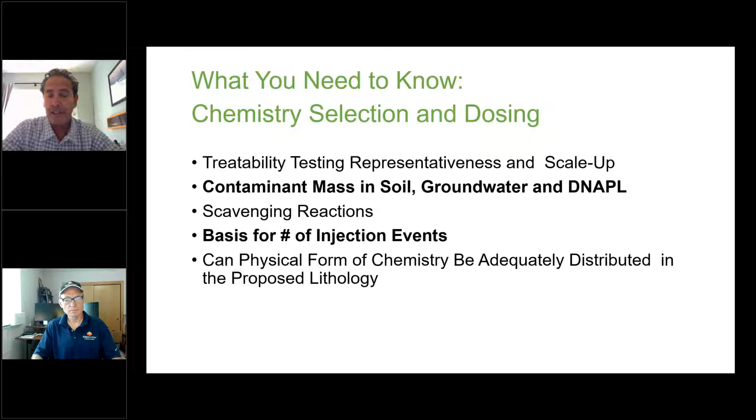Sorry about that. If treatability testing is done, is it representative and can it be scaled up? Do we understand contaminant mass in soil, groundwater, and DNAPL phases? Are there any scavenging reactions that we have to account for? What's a good basis for the number of injection events for a project? And then something close to my area of expertise, can the physical form of the chemistry be adequately distributed in the proposed lithology?

So in terms of contaminant mass, the point here is in terms of transparency, there's really two scenarios. You've got a turnkey project where you've asked the vendor to provide you with a design, the chemistry, and the delivery, or you've developed the design and selected the chemistry, and you've reached out to a vendor for delivery. And those are really the two scenarios.

And so in the case where you're getting the design and the dosing, it's really important for you to understand all the contaminant mass distribution in the various phases. And then also what kind of porosity is going to be used. Is it effective porosity? Is it mobile porosity? It's really important to understand that as part of the design that you would receive.

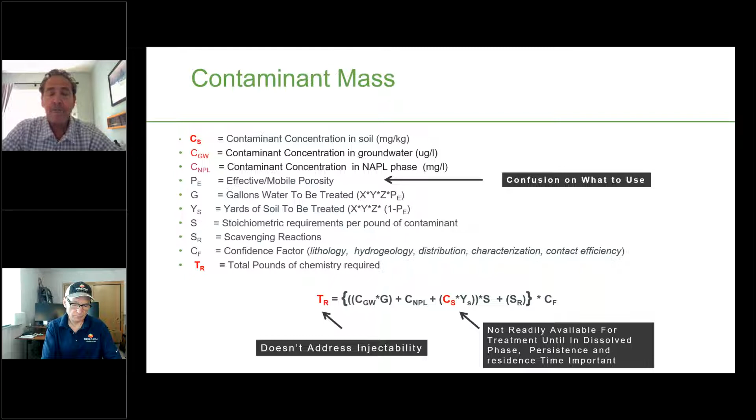We need to also understand how the sorbed phase is going to be treated and managed over the life of the project. So when you get a design, I think it's critical to get that information.

The other thing is, how do we develop the number of injection events? And so there's a lot of different approaches to that. I think it's very important to understand, is all the sorbed and dissolved phase being treated in one event, or is there some accounting for matrix back diffusion that will allow or provide you with the information to be able to come up with a rational basis for the number of events?

And in this slide, basically what we're doing here is coming up with a basis for the amount of oxidant we'll need based on the mass in groundwater and soil, but we're also taking a stab at what kind of back diffusion rates we're going to get and how much oxidant we can inject in each event without wasting any of the oxidant. So very important to understand how the number of events is developed, the basis, and not just rely on a rule of thumb.

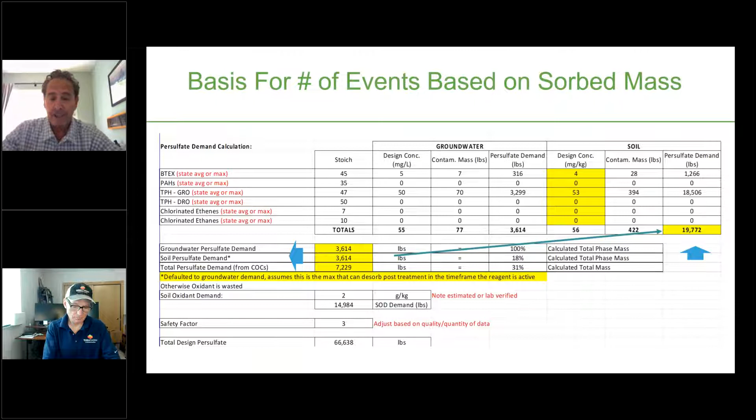And then here you can see what we've done here is we've taken the total amount of, in this case persulfate, that we're going to inject. We divide the total amount that we need stoichiometrically, and that tells us we're going to need 3 events.

So if you're getting a design from somebody, it's very important that you understand how they're reconciling what's sorbed in the soil mass, in the dissolved phase, and if there's DNAPL, that's even more important. So these are very items that require high transparency for you to assess the type of performance you're going to get on your project.

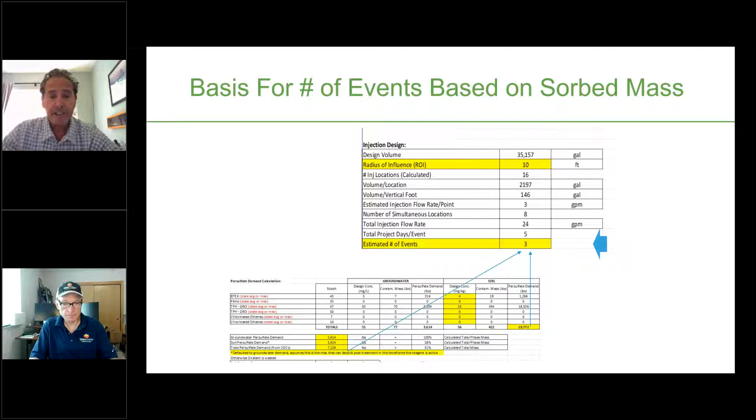So then we move over to the injection design, and there's key issues here that need to be understood. You need to know what's the design basis for the radius of influence, what's the design basis for the injection volumes to be injected, which relates directly to the radius of influence. What's the basis for the target interval you're going to inject into, and then your basis for the delivery approach. And then also, we'll talk about pressure and flow limitations that are very important when you're looking at making contact.

And then also a subtlety, but what's the basis for where these injection locations are placed versus where the monitoring wells are located.

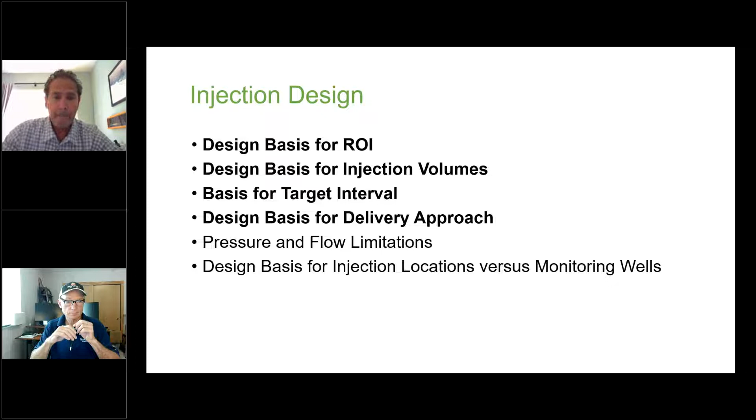So in terms of radius of influence, we've talked about this for 15 years in different webinars. And on the right, you can see that's probably your ideal case of a core 10 feet away from an injection zone with potassium permanganate. So you can see, that's the golden goose we're trying to achieve, and obviously that's more difficult as we get into heterogeneous sites.

But it really comes down to understanding the mobile or effective porosity, the volume you're going to inject, how much additional flow you're going to get by advection, and then that'll add up to your radius of influence. And so in this case, an 11.5 foot radius of influence is achieved by injecting 20% of the pore volume, effective or mobile, depending on how you look at it. Additional 8 feet of effective distribution, and that all occurs in 16 days.

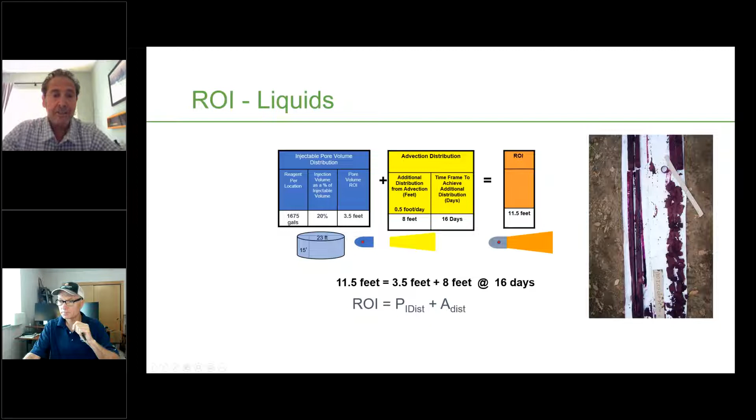So the other thing you have to take into account is the residence time and persistence of your chemistry. So that 16 days becomes important when, let's say, you've got very low seepage velocity or flat gradient, and it's going to take 180 days to reach 11.5 feet. So that's radius of influence, and that's key in terms of transparent information on a project.

The other question in a design is, what's going to be targeted? Is it the transmissive zones or the storage zones? We all know that in most sites, 90% of the groundwater flows through 30% of the cross-sectional area. Am I going to design based on injecting into that? Or is the design going to focus on the 10% of groundwater that flows through 70% of the cross-sectional area, which is typically fine-grained material?

Am I going to go after that by fracturing or enhancing permeability? You can see on the left, there's somebody struggling with that decision, and believe me, that's a critical decision in a design and approach that you've got to understand moving forward.

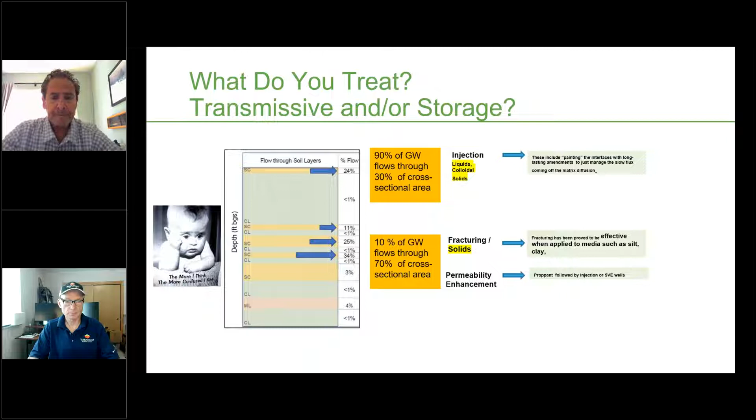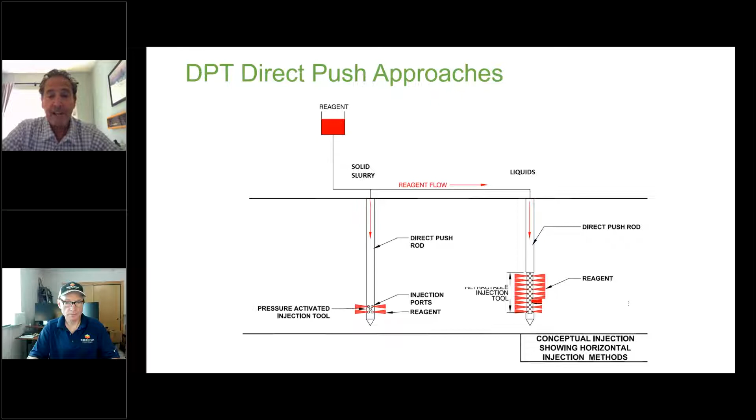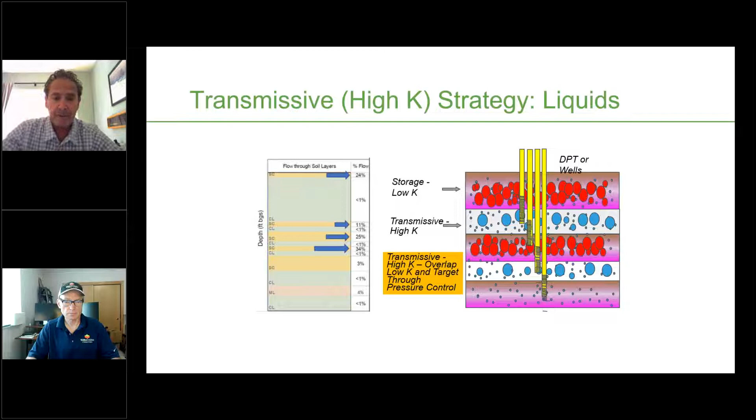So we get into this situation where maybe the design is going to just target transmissive zones with direct push wells. We can do that with injections, direct push screens or well screens, and we can intercept the high perm zones and get amendments into those transmissive zones. That's an example of an injection tool that can be used to accomplish that kind of distribution.

When we look at both low and high K zones, a lot of projects want to target everything. It's really important to understand that that's what you're getting. In that case, you're going to have to use a more aggressive targeting approach with a jetting type tool to really make sure you can get amendment in both the storage and transmissive zones.

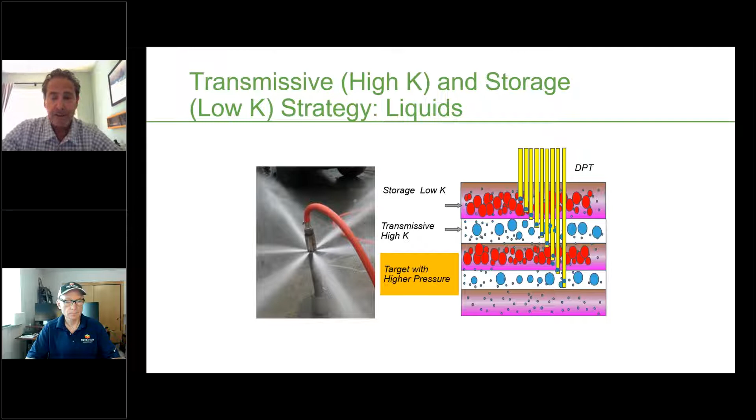The other thing we look at is the direct push rigs and tooling, the pump selection, the mixing equipment, and the flow and pressure measurement. At the end of the day, it's all about the pump and how we can control and manage it. So it's very critical to understand what pump you're getting on a project.

When we look at direct push drilling, for example, these are key items. I won't go through all of them, but this is the type of information you need to obtain as you move forward on a project, selecting an approach and a contractor, or deciding how you're going to do it yourself. With direct push drilling, there's the drill rigs, the type of tooling, whether or not you use inner hose, how you overcome refusal, and how utilities are marked and hand cleared. All of these have direct and indirect impacts on performance optimization.

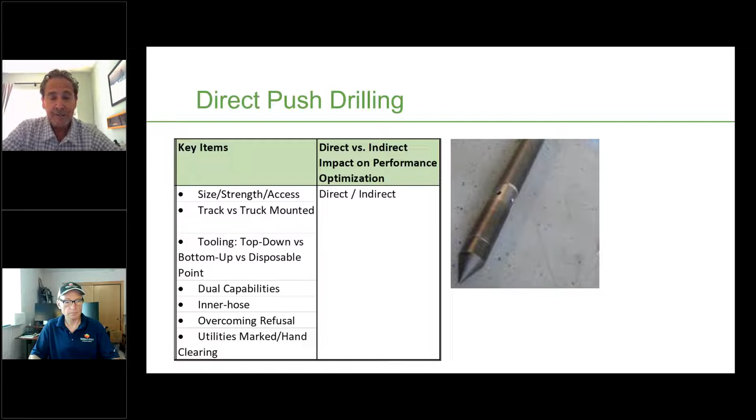In this case, they can have a direct impact in that the type of tool can definitely affect the type of distribution you'd achieve. But they can also have an indirect impact in that, what I like to say, it takes your eyeball off the task at hand. There's a lot of things to focus on, and if you're focused on things that aren't going right, then you've got less time to focus on the things you've got to get right, which is the actual delivery and contact of the amendments.

And there's just another tool: the pumping systems. Obviously, as I said, that's critical, it has a direct impact on performance. You really need to know the pump type, its pressure and flow curves. Does it have to be calibrated? Can it handle liquids versus solids? Is it compatible with corrosives? How is it powered? Does it need pressure relief? Does it have a variable speed drive, or do you need to recirculate? And how is that pump going to be manifolded?

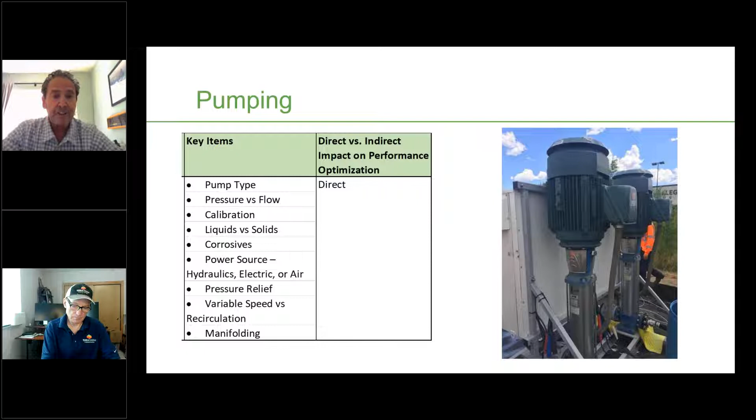You can see here, this has a direct impact on your results. The manifolding is also important because that's going to impact your cost. So the ability to optimize through manifolding is something you need to understand — how many points, how it's going to be done, how the points are going to be started up. All that type of information is going to be very critical for you to be able to understand the performance and measure that in the field.

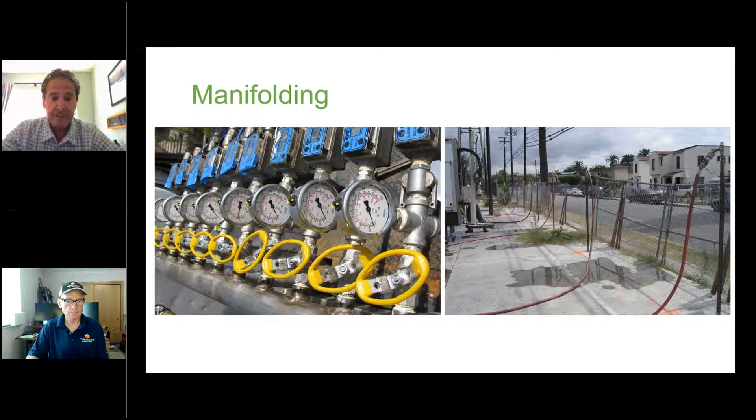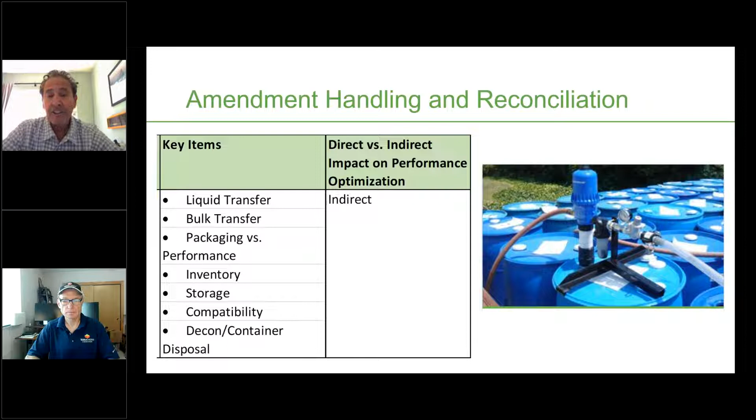Amendment handling and reconciliation is always important because you don't want to end up at the end of a project with too much or too little amendment. That has an indirect impact typically, unless you don't have enough left over, and then it can have a direct impact. You need to understand how liquids and bulk solids are going to be transferred, packaging versus performance in terms of mixing efficiency, what your inventory will look like, how you're going to store it, whether all the amendments are compatible with each other, and how you're going to decon everything when done. These are all important factors you need to understand.

Mixing is critical because if you don't get a uniform mix, you're not going to get good distribution. There are issues like inline mixing, batch mixing, tank size, how you're going to mix liquid and solids. Are you going to inline inject something like Dehalococcoides? How do you handle overflow? Are you going to pulse mix, or do you need to filter? What kind of ventilation and air monitoring requirements will you have with bulk solids?

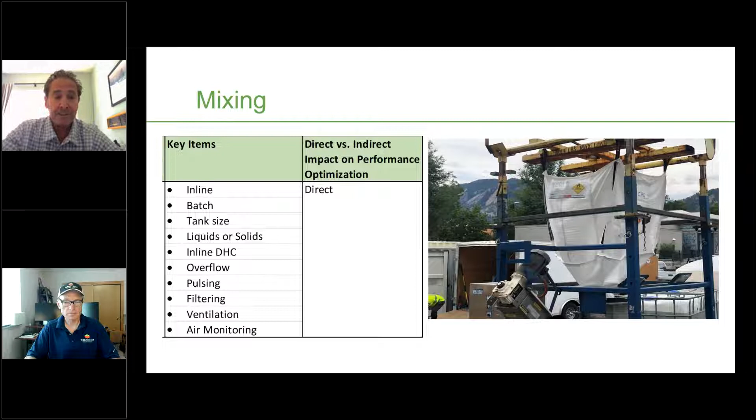Here are some shots of different liquid amendment mixing capabilities, but generally they're totes, small tanks, large tanks, and sometimes intermodal containers. You really have to have a very good understanding of how mixing is going to occur on your project.

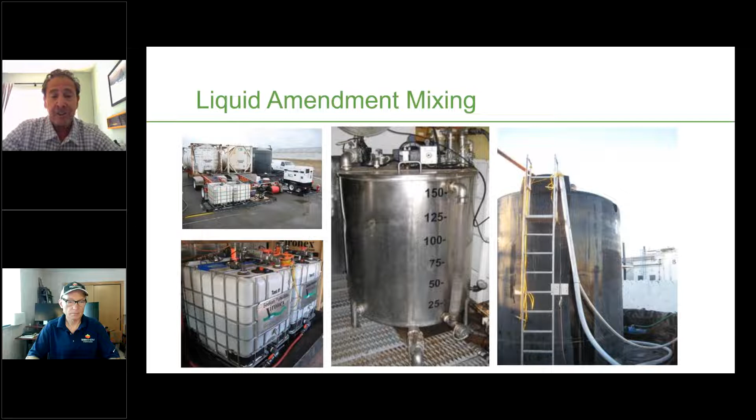When we look at pre-mob, really the key issues are the footprint of the site, the equipment, how everything is going to be delivered, secondary containment, exclusion zones and decon, water and leak tests, rental equipment being delivered, scheduling, night or day work, work hours, and DOT restrictions. All important things that need high transparency.

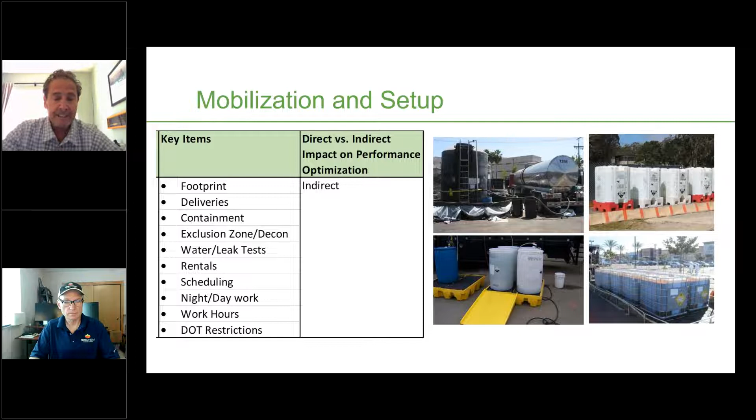Safety. I don't mean for this to be last because it's first, but it's often overlooked. There are key items for safety: the health and safety plan, the safety data sheets, the JHA, JSAs, standard operating procedures, and what PPE is going to be used. Our experience is it's all over the map, and you want to make sure you or your contractors are protecting themselves. A spill control plan, PFDs of the operation or equipment to understand how it works and what safety issues could arise. Tailgate meetings and near miss reporting, training of the folks, and how you manage short service employees.

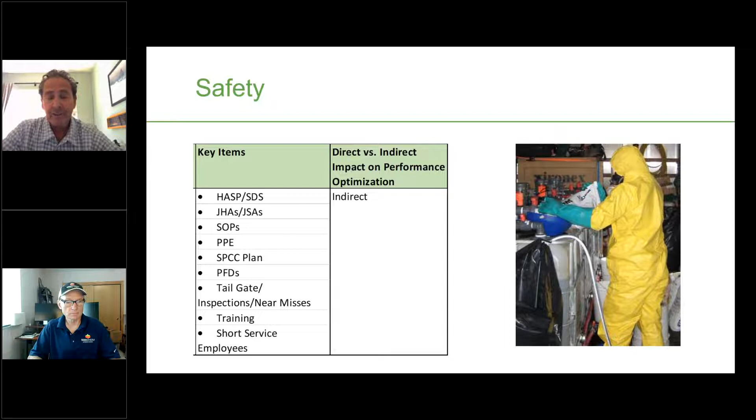Safety is another indirect issue, but if any of these things rear their ugly head, they can have a direct impact because, like I said, they take your eyeball off the project.

What else do you need to know on injection? Really, you need to understand if shakedown and distribution testing is going to be performed, how everything is going to be monitored, and what the approaches are for troubleshooting.

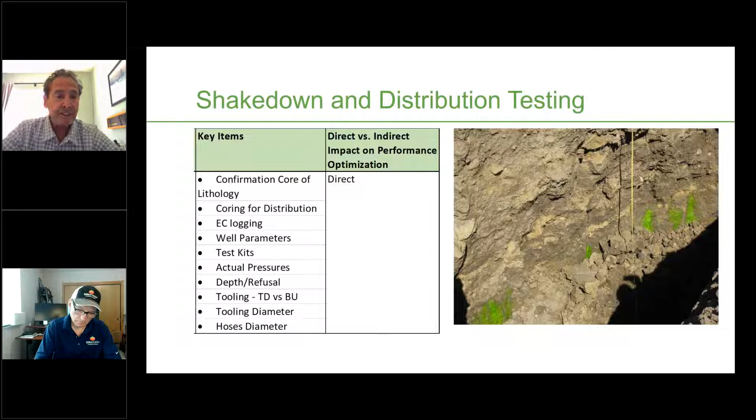But we really need to understand: are you going to take cores? Are you going to do electrical conductivity logging? Are you going to monitor the wells for parameters? Are you going to use test kits? What actual pressures are you going to see during the test? Is depth and refusal a problem, which it can be? What tooling works best, top down or bottom up, and in terms of tool diameter and hose diameter? This is critical information that directly impacts the success of your project.

On the injection logs, what you've really got to understand, critical especially when going back to understand post-injection monitoring results: how is pressure flow going to be measured? How are you going to measure the time amendments are injected? How do you reconcile inventory to make sure you're on track? Whether you need to measure air quality for certain projects. Are you going to use digital or manual recording devices? Do you truly understand the depth, intervals, and boring locations you're at? These all have direct impacts on project success.

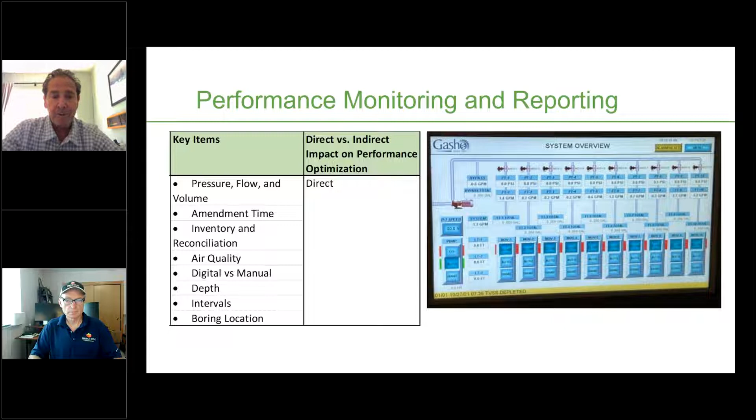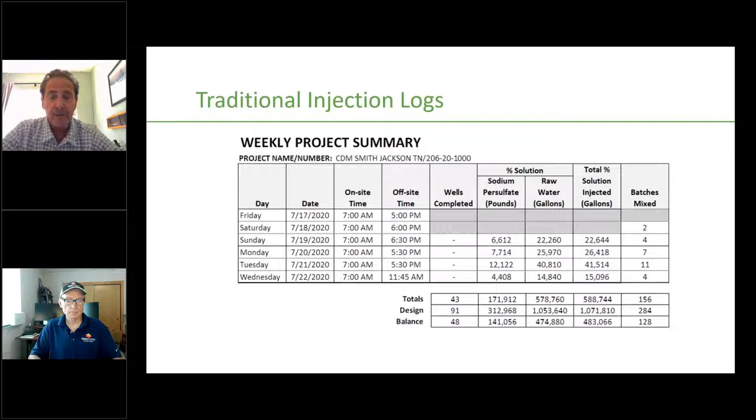But typically, this is what you're going to at least want on a traditional injection system: a weekly summary, the amount of amendments injected, total solution, batches mixed, and then you want to accumulate that data over time so you have a running total. This is the minimum information you want on a project at the high level.

You then want to get into the actual injection locations, where you want to understand each individual well or direct push location.

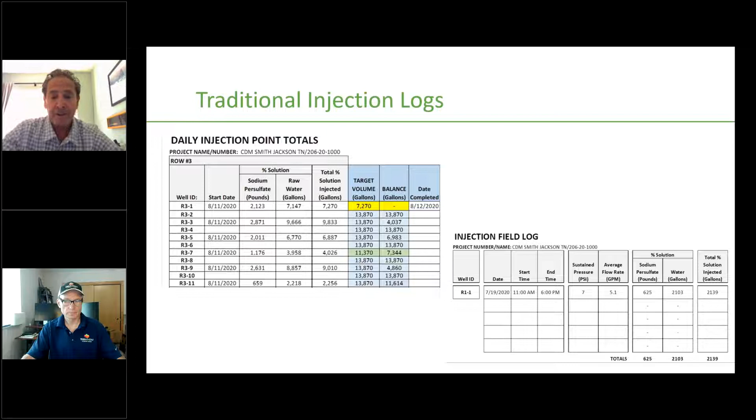And then you want to be able to go in and measure pressures and flows, and the amount of amendments and total solutions at each individual point and at each individual interval. So this is what I would consider the bare minimum to have, to be able to understand what happened during your injection event. It should be totally transparent.

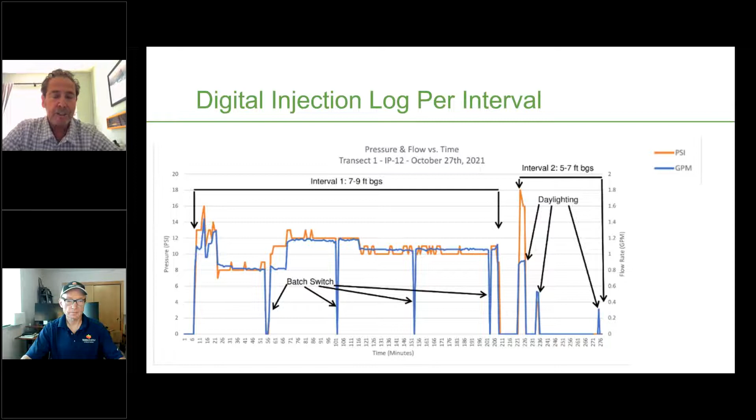If we go with a digital approach, you're going to eliminate all this uncertainty. In this case, we're able to track pressure and flow continuously, and you can have no uncertainty as to the averaging time, or was it recorded effectively manually, and things like that. So while it's not a requirement in terms of transparency, we believe it's the next step in terms of transparency related to how the injection event went.

And then troubleshooting - I'll finish this real quick. Not everything goes right on an injection project. Hopefully it's man versus geology and not man versus equipment, but you need to understand how troubleshooting can occur. Things like pressures and flows not being what was expected. You've got refusal, you're getting daylighting, you have to skip intervals, you've got adverse weather conditions, equipment breaking down, which hopefully is kept to a minimum.

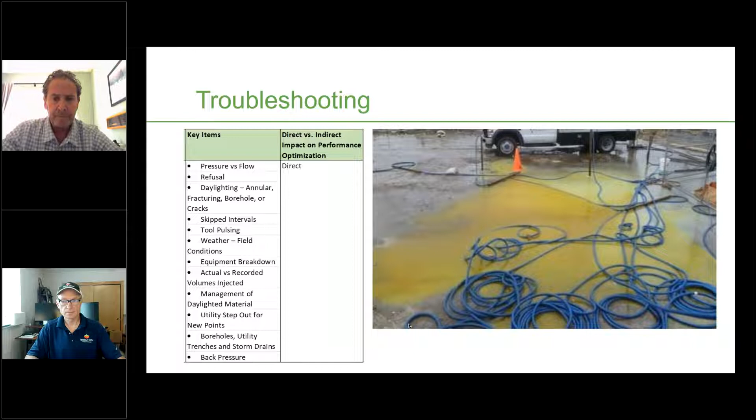So at that point, I think I gave you a lot of information on what you need to know, whether you're designing a project yourself and subcontracting out the injection, or whether you're getting the whole enchilada from a vendor. Those are the key things we believe need to be 100% transparent, and will just help ensure that you get what you wanted or expected.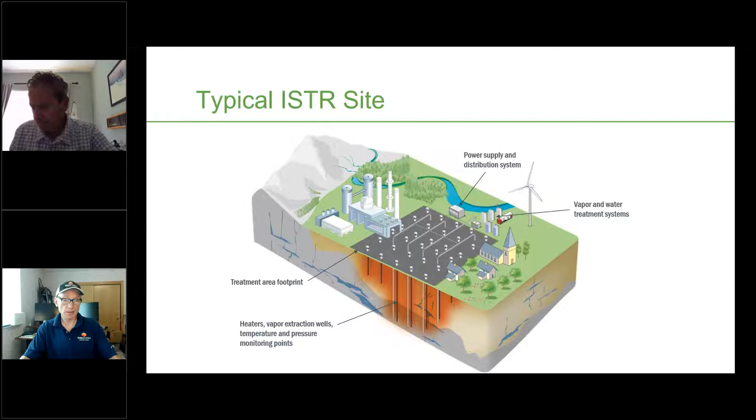That generates COC vapors, but it also generates steam vapors, and the COCs partition into the steam. Then we have an extraction system that pulls all of that out of the subsurface and sends it to a treatment system. So big picture, that's basically what in situ thermal remediation is.

The technologies that we have in our capability to implement or use at these sites to heat up the subsurface: thermal conduction heating, where we drill holes, put pipe in, put a heating element in, and heat the subsurface via thermal conduction. We also have electric resistance heating, where we put electrodes in the subsurface and apply a voltage potential to those electrodes, encouraging current flow between the electrodes - it's the resistivity of the soil to that current flow that generates heat or heats up the subsurface.

We also use steam injection, where we basically have a small injection screen, typically 1 to 2 feet long, and we target specific intervals to inject steam, developing steam zones within the subsurface that surround and envelop the target treatment zone. And in some cases, depending on the geology, we use both - a combination of TCH and steam, or ERH and steam, to heat up the subsurface.

All of these technologies apply at least vapor extraction to remove steam and COC vapors. In some applications, like when we're using steam, we'll also extract groundwater to provide not only pneumatic control, but also hydraulic control, so we don't spread contaminants and remove everything in the subsurface.

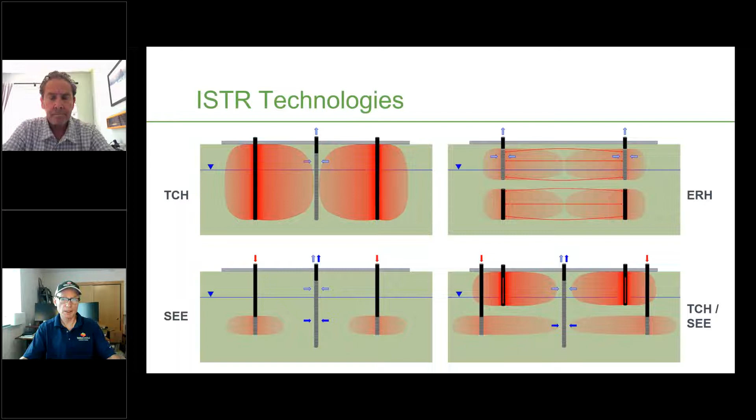In situ thermal remediation is really primarily a mobilization technology. What we want to do is mobilize the contaminants out of the hard to reach or hard to access zones, the DNAPL, the low permeability zones, get that into the vadose zone where we can extract it and send it to the treatment system.

So how do we choose? First off, we start with COCs. We look at what contaminants we're targeting, and primarily we're looking at volatilization and steam stripping to get those out of the subsurface. But if we look at the low temperature approach, in this green section of the figure, this is actually not targeting volatilization as much as it's targeting degradation.

So either bio or abiotic degradation mechanisms. When we heat up to 35 C or so, we can promote biological degradation. And if we take temperatures up to 70, 80 degrees C, we can actually promote abiotic degradation mechanisms such as hydrolysis. For certain COCs, we can do a very good job with that.

The nice thing about that is we don't need vapor extraction and treatment systems, so it can be very cost effective. But for the bulk of our sites, we're looking at heating the subsurface to 100 C, targeting VOCs, BTEX, CVOCs, as well as some of the lighter end semi-volatile compounds like naphthalenes and chlorobenzenes.

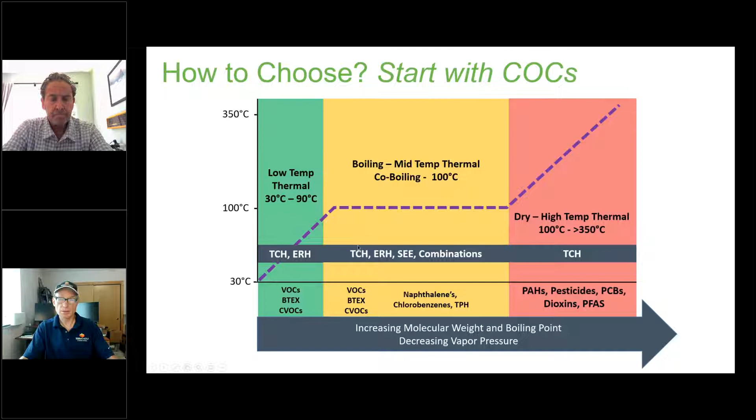And then we always have the ability to go to higher temperatures depending on if we're targeting PAHs, PCBs, even PFAS. But primarily, most of what we see from site remediation for in situ thermal is targeting 100 degrees C, and for that range we have a bunch of options: TCH, ERH, steam, and different combinations.

So how do we choose? Once we know what our COCs are and we're looking at the 100 degrees C treatment approach, then we start to look at what geology we're targeting - what are the specifics of the site.

A lot of our sites have a mix of geology. So we might have sand and gravel units, we might have silt and clays, we might get into saprolite or fractured rock. We need to look at all of these and evaluate how these technologies or combinations would do. The key parameters based on these technologies are the thermal conductivity of the soil or rock.

The electrical resistance - again, this is when we're looking at using ERH - and the permeability. Permeability comes into play not just in terms of being able to inject steam in the subsurface for effective heating, but also in terms of assessing how much groundwater flux below the water table we might have in a zone. So we have to evaluate all of these.

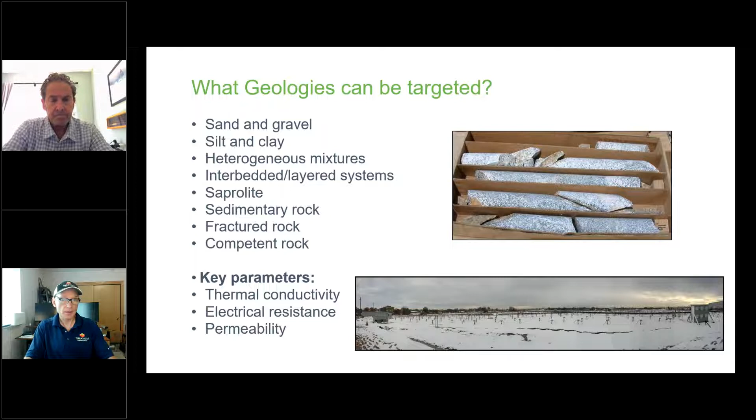What we find though is that thermal conduction heating is a great fit for a lot of sites, and that's because of the uniformity of thermal conductivity. When we look at thermal conductivity for all the different materials in the subsurface - minerals, sedimentary rocks, volcanic rocks, et cetera - we have a total possible range between 1.5 to 7 watts per meter Kelvin. That's a pretty tight range compared to permeability or resistivity. So what we see is the site variation is generally within a factor of 2 to 3, which is pretty narrow.

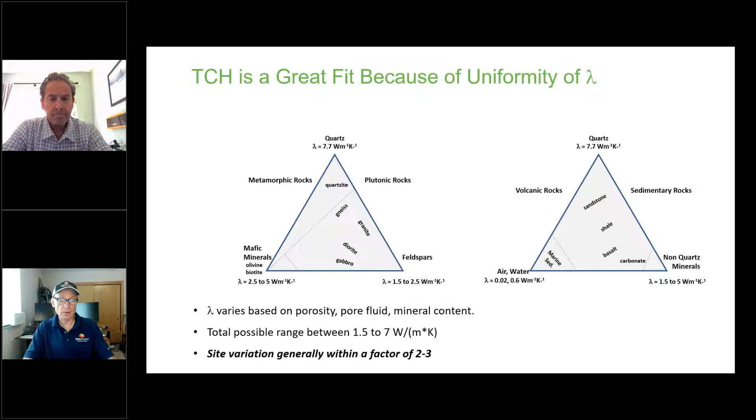Electrical resistance heating, when we look at that, is based on the electrical properties - the conductivities or the electrical resistance of the soil. What we find is that the optimal range is 10 to 500 ohm meters, which is a measurement of the resistivity of the soil.

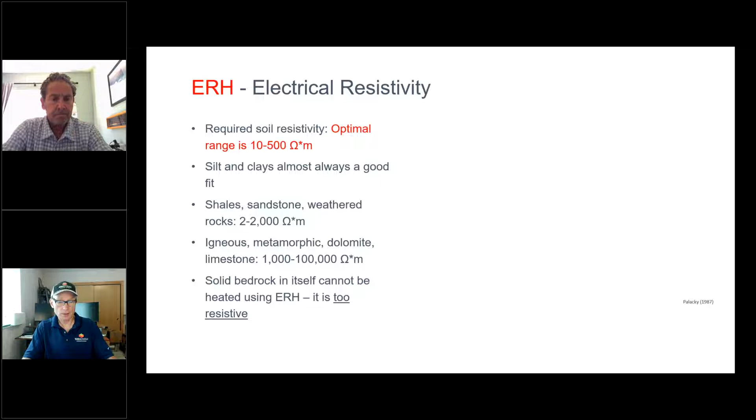Why is that? Well, we can do sites that have lower resistivity, meaning they're more conductive, or sites with higher resistivity, but that requires special equipment, higher voltages, a lot more current, and it makes it more complicated and in some cases riskier. If we have to use high voltages at those electrodes, we can run into stray currents and voltages that might be an issue for workers or building infrastructure. So we tend to see this range of 10 to 500 ohm meters as being pretty ideal.

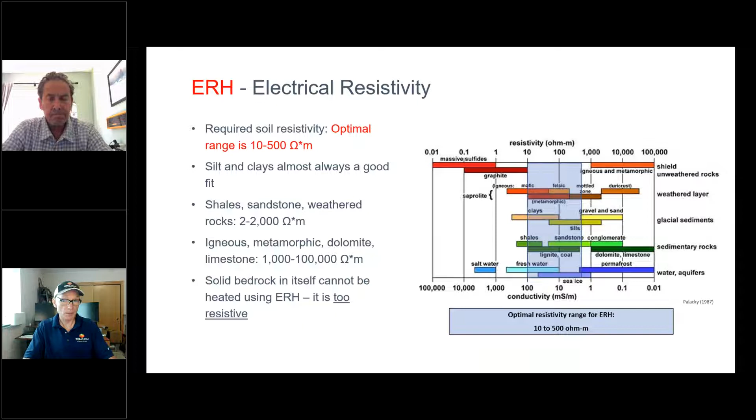Solid bedrock itself is not conductive to sufficient levels for ERH heating, so it's just too resistive. We don't use it. So for sites where we have optimal resistivity, we can use ERH. Where we have sites with much higher or much lower resistivity, we can then use thermal conduction heating. We look at choosing the right technology for the site, not trying to use one technology for all sites.

Where we have high permeability and potentially high groundwater flux, we can use steam alone if that's the entire treatment interval, or we can combine steam with other technologies to address the groundwater flux and do a good job of heating.

Generally what we find is that steam is a good fit if we have basically 1 Darcy or greater in terms of permeability, or in centimeters per second, that's about 10 to the minus 3 centimeters per second. If it's higher permeability than that, it's good for steam. If it's lower, it's not so great.

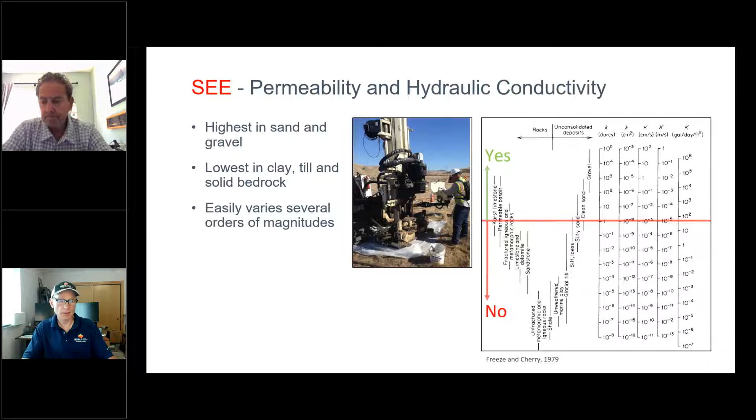What we find with steam is that it's very dependent on the permeability. Unlike thermal conduction, permeability ranges by many orders of magnitude at a site. So this is why thermal conduction heating, or TCH, combined with steam, or even ERH at the right resistivity ranges combined with steam, make good applications for a site.

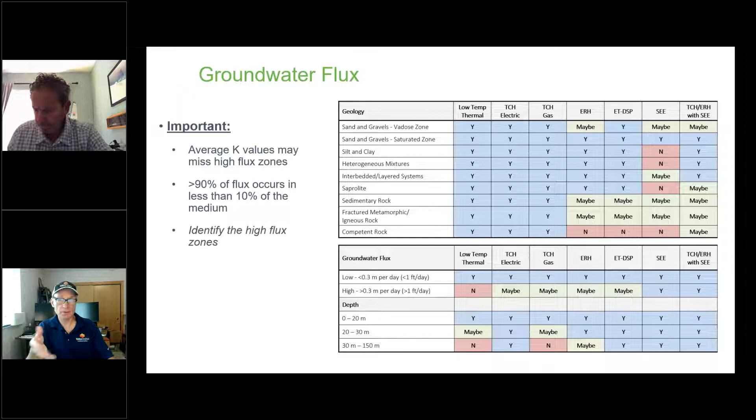This issue of groundwater flux is important, and I think Elliot touched on this before, but 90% of the flux occurs in less than 10% of the cross-sectional area, because of the effective porosity or permeability of these formations. So when we look at data from a site, it's important to have good hydraulic conductivity data and discrete data over particular units, so we can identify where we might have high flux zones, so we can design systems around that high flux zone to address it, and add steam if we need to do a good job there.

So let's talk a little bit more about design and lifting the veil on how we do the design. I kind of think of this as getting a quote to paint your house.

You may get 10 quotes or 5 quotes. They range in price, but until you dig into it and see what kind of paint are they using? Is it oil-based? Is it water-based? How many coats are they applying? Are they brushing your house or scraping it first? What are they doing for cleanup? How many people are going to be out there? You really can't compare those numbers, because you need to understand what goes into that design in terms of what you're actually getting for that price. What is the quality of your house paint going to be? How long is it going to last? How's it going to look? How much mess is going to be in your yard?

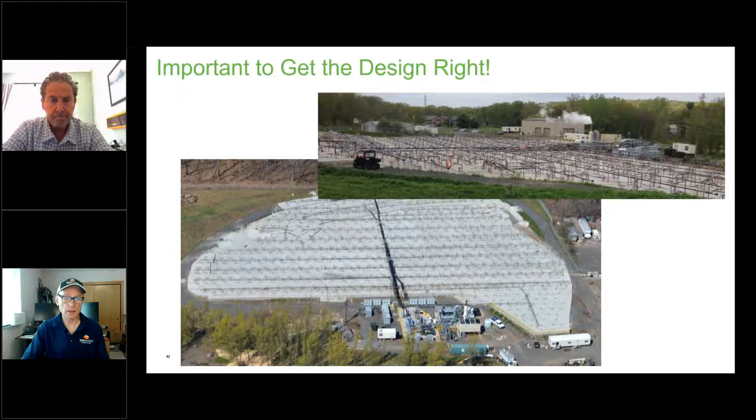You have to do that. You have to look at the details. So that's what we're going to look at here relative to thermal. The important thing with thermal is you got to get it right. These are not simple systems. They're complicated, can involve quite a bit of infrastructure and quite a bit of drilling. So you better do your homework up front and select your technologies, but also do a good job designing, because it's pretty hard to overcome mistakes you've made up front once you get into implementation.

Let's start with something very basic to thermal, which is we got to add energy to the subsurface. So what this graph shows you is an example site, 5,000 square meters, which is roughly 53,000 square feet, so a little more than an acre. We're using ERH here. We have 2,000 watts per meter input into the subsurface. What that means is for each meter length of electrode, we're putting 2,000 watts in. And that gives us a heat up here of...

This gives us energy density input, and then for different spacing, we get the number of electrodes, and we can actually look at - this could be heaters too, we'll talk about that in a second - but if we have, for example, 6 meter spacing between our electrodes, we'd have a little more than 250 electrodes over this area.

And we'd have ultimately roughly around 90, a little more than 90 watts per meter cubed going in.

So this is important. How many coats of paint, how much energy are you putting into the subsurface? What are your design assumptions? What is the unit length power input, whether it's ERH, TCH, or steam? How much steam are you injecting into the subsurface? And then looking at the spacing that you have for these things.

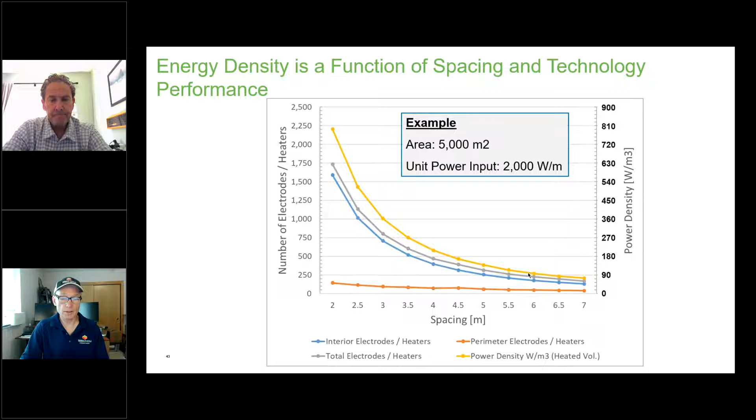Also, importantly, if you don't do this, then you have a situation where you're heating on the inside, creating steam, and it's pushing to the outside. An outside perimeter of heaters or electrodes pushes and provides that hydraulic and pneumatic control.

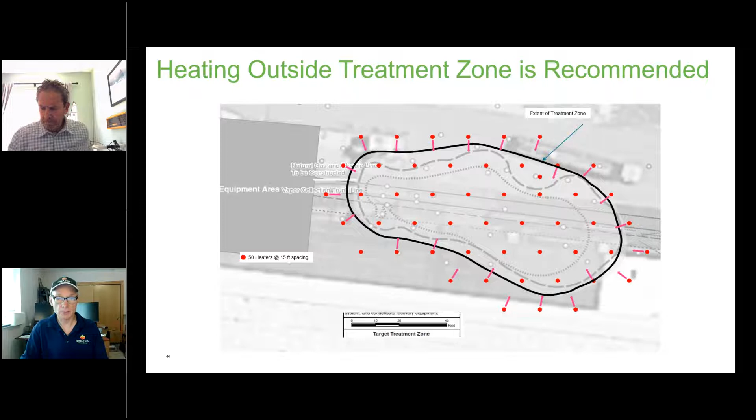So when we look at this for ERH, for example, pretty standard spacing is somewhere between, this is in meters, but it's roughly 18 to 21 feet. If we look at that kind of spacing, 2,000 watts per meter, that gives us 54 to 85 watts per cubic meter. So that's what you want to be looking for in terms of the proper energy density to achieve cleanup within 6 to 8 months.

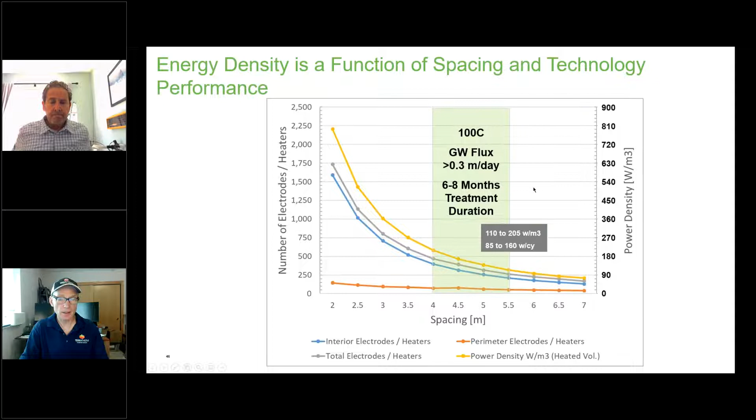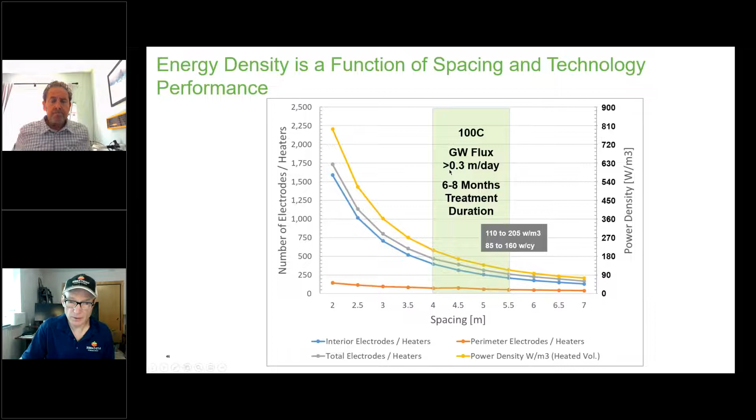If we decrease that spacing, we can get much more energy into the ground, and we can actually treat a little bit higher groundwater flux rates within that same time period.

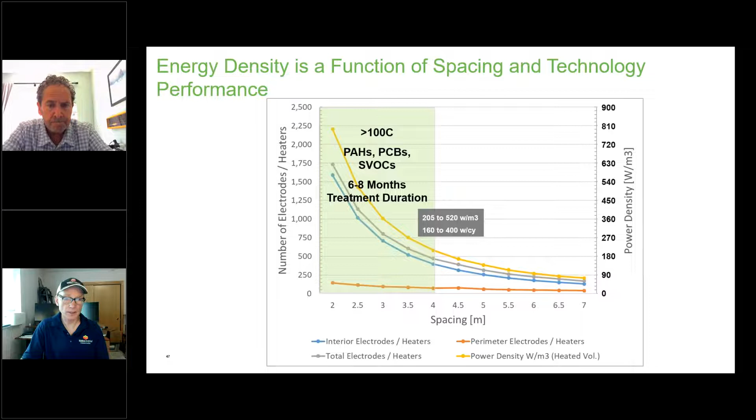And if we're using thermal conduction heating, we'll use much smaller spacing. It's obviously a lot more heaters, but this is where we can achieve temperatures of greater than 100 C, as much as 350 or 400 C if necessary to treat PAHs, PCBs, and such.

So let's take a look at how we use these numbers. Again, this is getting into the detail of the design. It's not enough just to say I'm giving you 100 heaters, 100 electrodes, and it's going to be done in 6 months. You want to ask some specific questions.

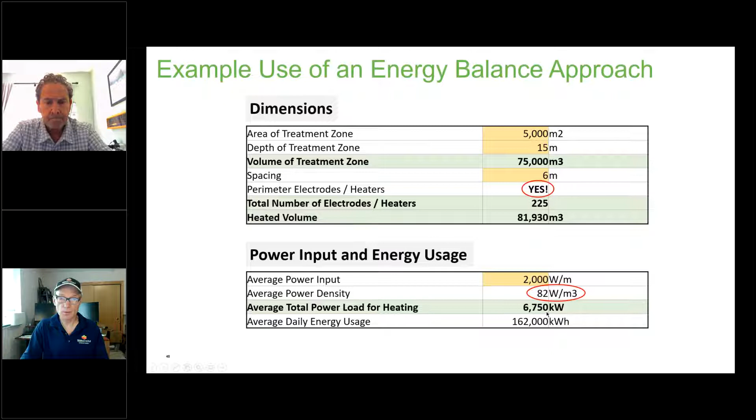One is, what is your spacing? Are you including perimeter heaters or electrodes? This is key, as we just saw. And what is your average power density going into the subsurface? We want to target somewhere in the range of 70 to 80 watts per meter cubed to get effective heating at these sites. Once we do this, this is where we get our total power load, or what we need from the utility to heat the site.

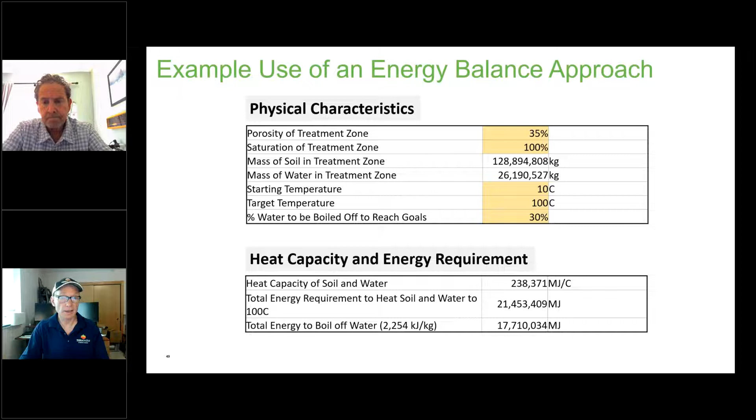You also want to know what's going into those calculations relative to assumptions about porosity and saturation. This is all going to factor into how much energy is needed. So we have so many heaters, electrodes, or steam injection wells, we can put so much energy in over a period of time. We have a certain heat capacity or energy requirement to meet those goals or to heat the site up. That gives you the duration. So all of these things are really important to take a close look at.

The other side of this, which is often overlooked, is the heat loss calculation. You're going to get heat losses to the top, to the bottom, the sides. What is your conductive and groundwater flux heat loss? What is that number, or what percentage is that of your total input?

The other thing is that all of the energy that we put in doesn't stay in. We have to extract the steam and water. So what is the percentage you assume? That actually gets you a net input. So looking at and comparing different designs, you need to understand that.

Once you have this net input, this is how we come up with our number of days required. So one vendor may say it's going to take 90 days, another one may say 160. Why is that? It's not because they're using a different technology, or because the technology doesn't work as well as somebody else's. It's because of these assumptions.

So if you make generous or optimistic assumptions, you're going to end up with a shorter treatment duration. Maybe it works, but most likely it won't. You need to have a real good understanding of those numbers to understand the certainty or the probability of success of your design.

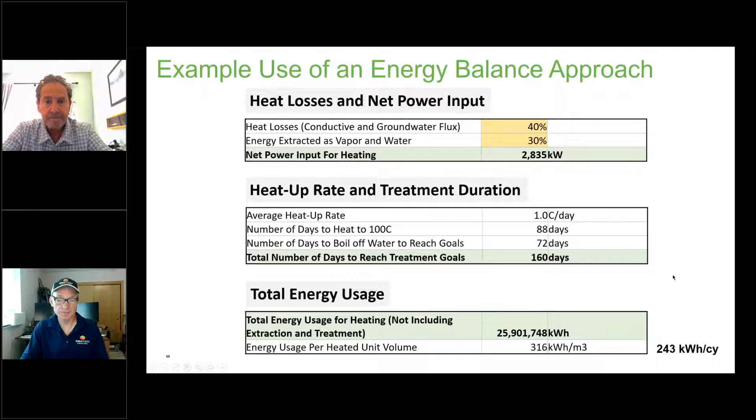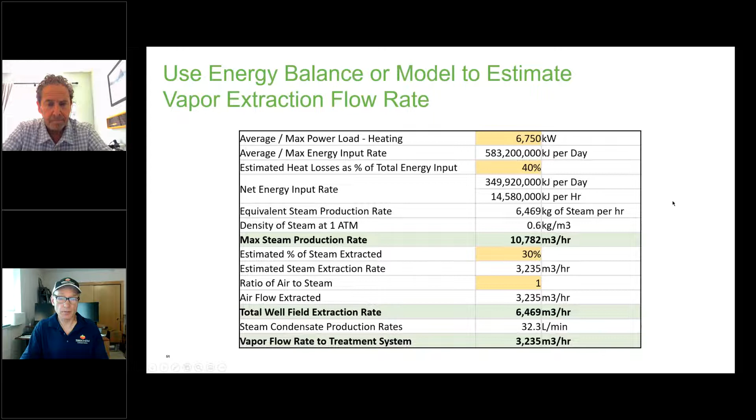Ultimately, we can use the same kind of approach to calculate all of the design factors, and this is going to impact your costs. How big of an extraction treatment system do I need? How much steam am I going to generate? How much condensate do I need to treat? All of that comes from this energy balance approach, so you want to take a careful look at all of these things.

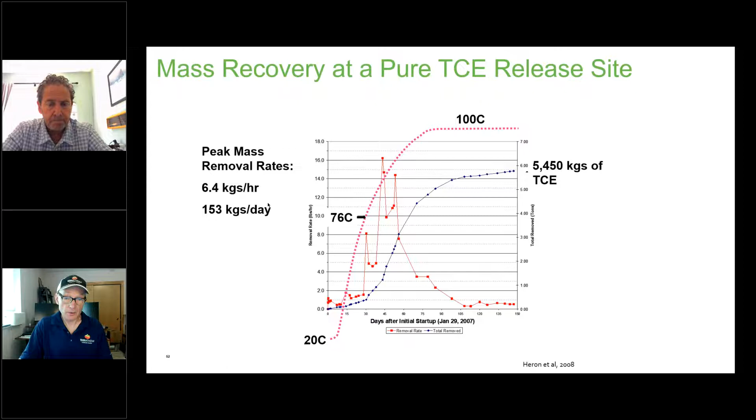For this site, what that meant was we had a total of 5,450 kilograms, and we look at the peak rate of 153 kilograms per day. That's 3% of the total, and that turns out to be a very good, consistent number. So if you know your starting mass, how much mass is in the subsurface, and you take 3% of that, that's going to give you your total mass loading rate.

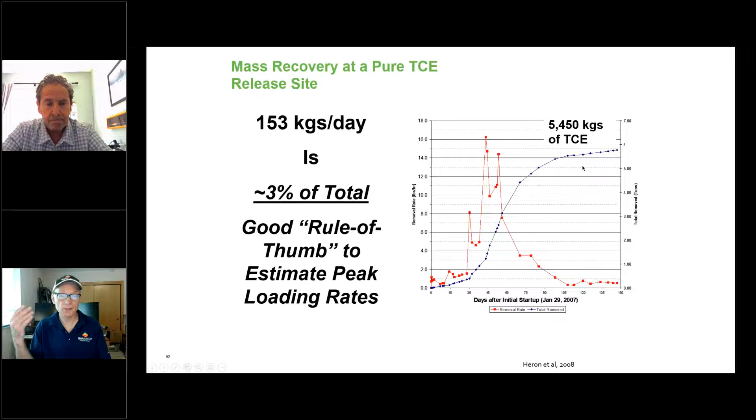How much steam you produce, how much air you need to extract to get hydraulic control, that gives you your vapor flow rate. Your mass loading rate comes from your mass estimate, so having a good mass estimate gives you that total peak loading rate. That's going to impact your selection of your treatment system as well as the sizing of that.

So let's take a look at transparency in operational data. We've gone through the technology selection, gone through design, now we're into operation. These sites go pretty quick, six months, so you don't have a lot of time to scratch your head or wonder what's going on. What you can do is consolidate all the information you're going to collect from the site into a data website or a data portal, and have access to track it on a daily basis, in real time in some cases.

For example, the temperatures, the heat up, whether it's in the subsurface or the operational characteristics of your treatment system, you want to be able to track those things and see what's going on, follow along with what the consultant or vendor is seeing and recommending, and anticipate if there might be problems. So what you want to look at is a range of things: temperatures in the subsurface, power and energy use, mass removal, water balance, vapor balance, and this all ties into the energy balance, how much energy we're pulling in, how much we're pulling out, and how does that track with what we thought would happen at the site.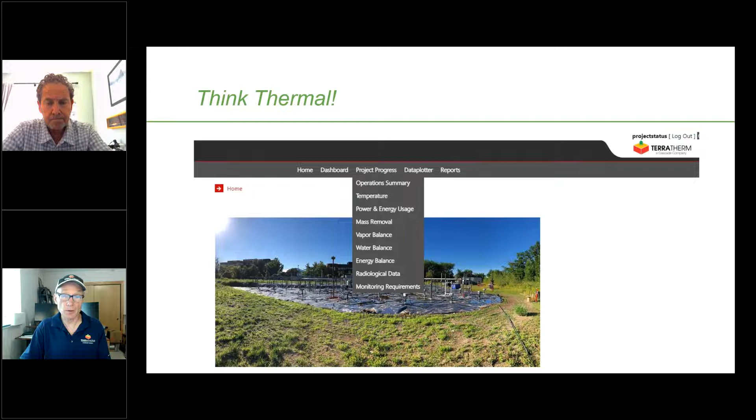Some sites may lag and you want to understand why. It might be an indication that geology was different than anticipated, or maybe the heating system's not running as planned, not able to get as much energy in the ground. Or for example, if it's an ERH site and you thought the resistivity was going to be X and it's a lot higher than that, that's going to impact how much energy you can get into the subsurface. There are things that can be done to affect that within a degree, but you want to track and see that early on and make decisions early, not wait until the end of the project to see how it turns out.

For this site, the target treatment temperature is 100 degrees C, so we want to see them all get to that point. That means the entire system is boiling, generating steam, removing those contaminant vapors. We're getting uniform treatment across the entire treatment volume.

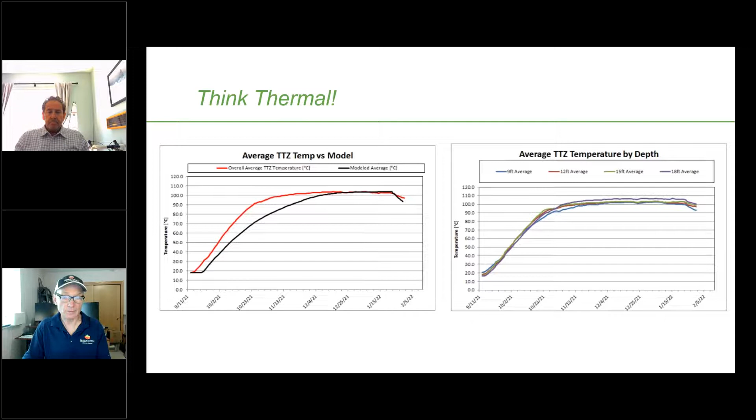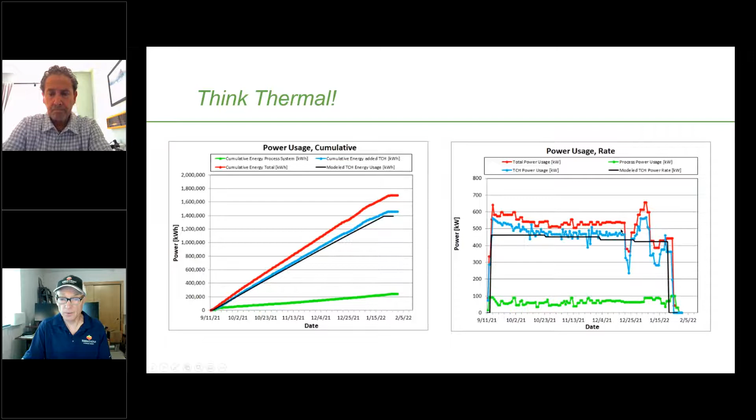Same thing with these usage rates. The black line is what was designed. We always like to do a little bit better than the design so that we get ahead of the game, and we were able to do that at this site and actually match up pretty well.

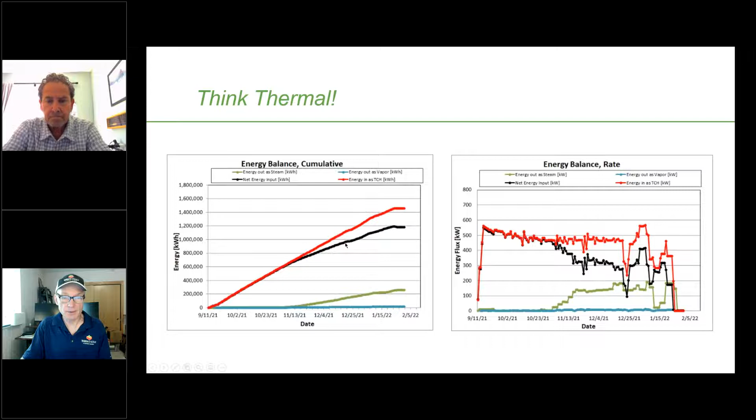And the energy balance, again this is key. This provides some direct insight as to how the site is heating up. You start to see this green line represents the energy out as steam. How do we calculate that? Well, we start to see condensate in our steam condenser. What that means is that the site's getting up to temperature and boiling and generating that steam. We know how much, this should line up with your temperatures. If we're not seeing this, then the site is not heating properly, and there are things we need to do to fix that. This net energy input should all match up with what we expected to see.

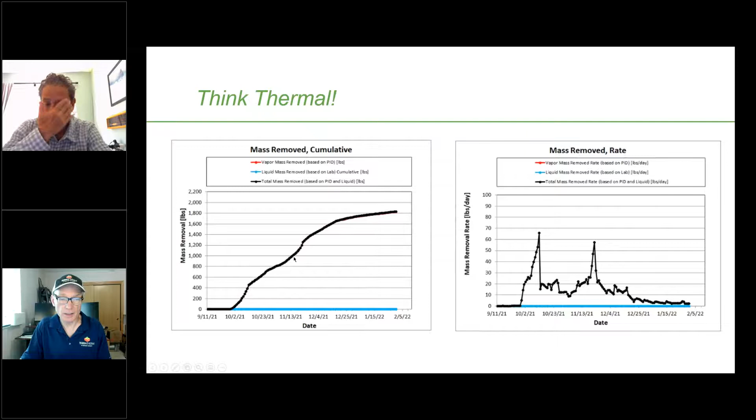This site, you can see where we're getting good mass removal. What's interesting here is that this peak started off, this was a TCE site, started off when the site was roughly between 75 and 80 degrees C. So this is where you're starting to see that DNAPL come out. The other thing we're tracking here is that when we start to see these low asymptotic mass removal rates, that's indicating, well, we combine with the temperature.

So we use a multiple line of evidence approach. We get the site up to 100 degrees C. We look at how much steam we remove. We're seeing that steam come out. All that lines up, the site's boiling. And then we see the peak concentrations come out. That means the mass came out, so the train arrived at the station. The mass got mobilized and we pulled it out. And then we see this decline in concentration. So this multiple line of evidence approach tells us the site is cleaned up.

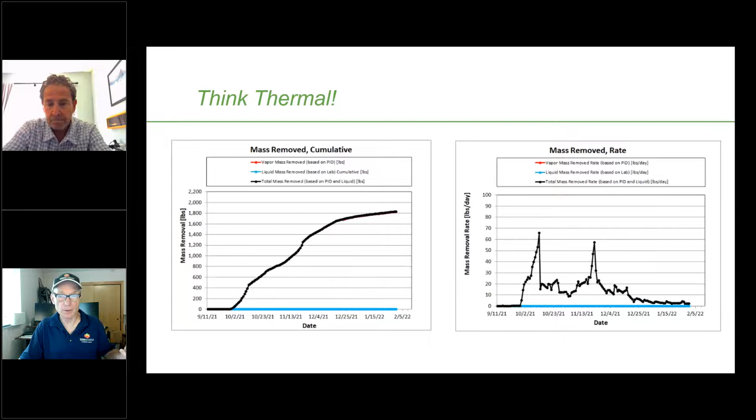And then the question is, how clean? Do we continue to operate this for a period of time? We never get to zero because we're treating source zones, so there's always mass on the outside, and the regulatory goals aren't zero. They're usually some number. So this is where, when we get down into this period, we would suggest going in and doing interim sampling, collect some soil or groundwater or both, see how we're doing, and determine whether we're ready to shut the site off and do verification sampling.

And with that, I think we're done. Hopefully we've lifted the veil on both injection technologies as well as thermal remediation. And I hope we've explained or revealed something that was maybe previously not so clear or maybe a secret. And with that, I think we are done and we're ready for questions.